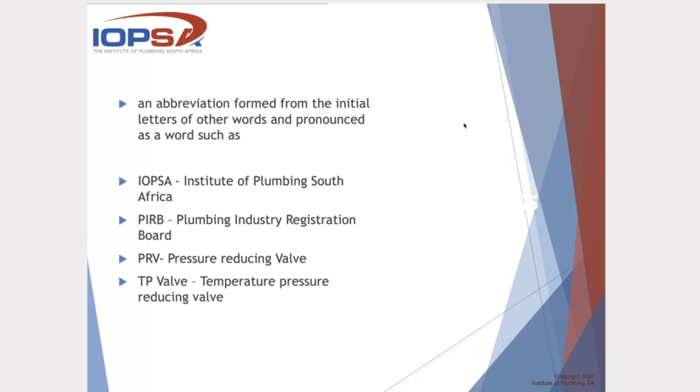But what do you do when you use an acronym in written communication? You'll write out the word fully. So in the case of the Institute of Plumbing South Africa, and then in brackets you will put IOPSA. The first time you use that acronym in any writing, directly after that you put your acronym, and then you can use it freely in your document thereafter, because you've explained it right in the beginning.

And so in your second paragraph, you can say the fact that IOPSA is a member organization means that it has a different mandate to the PIRB, which is a registration body where plumbers register to be licensed, because you've already qualified what that acronym is in the first paragraph.

So what a technical report is not: it is not there to entertain people. You're not going to keep the reader in suspense. You're not writing a thriller. You are just reporting, and that is basically it. Explain or give feedback on a situation, and in the case of a plumber, normally done after an inspection of a plumbing installation or a request pertaining to a certain occurrence. And at the end, we'll just briefly touch on doing a report for the sale of a property. I don't want to go into too much of that today, but I'm taking an example of a burst geyser.

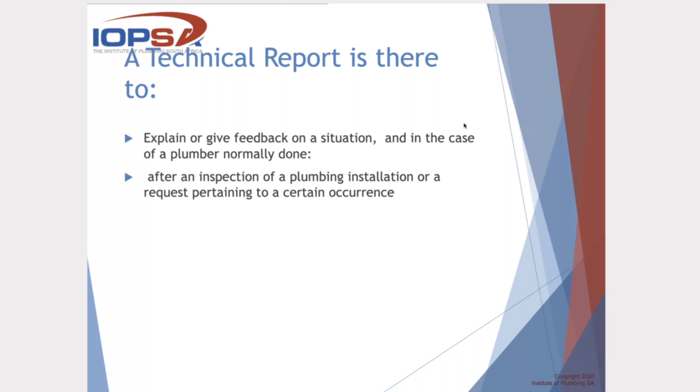So what is the composition of a report? You have a title, a strong title, because it must say exactly what this report is about. Introduction. In the introduction, you're going to give a bit of background, not too much, just what is necessary to qualify the report. And you're going to have an aim. The aim is to report on whatever the case may be. And then you've got the body of the report. Now, some call it a summary, some call it a brief. I just call it plainly a report. That is the structure, the whole story is in the report. And then your conclusion. And in your conclusion, you will have recommendations flowing out of what you've discovered.

So once again, in the title, make it concise, relevant details. So here's an example. You'll have your resultant damage report on water damage at 25 Pinelands Drive, Cape Town for the insured Mr. Jones, 19th November 2020. So there it says what the report is about. It's about water damage. Where is it? Got the address and who it is for, and the date that you're doing this document. The introduction contains the background to the situation, any information that the reader would require to understand what the report is about.

So let's look at an example of this. You've got that strong title up there, report on the possible cause of water damage, and you'll put it in bold letters and capital letters so that it stands out. Introduction, because something that stands out leads your reader through the document. Eventually, if a good reader and a good report writer understand each other, he'll only have to read the introduction, the conclusion, the recommendations and findings, and he'll know what's inside the report, because sometimes he doesn't have to know all the detail, and if he wants the detail, he can go and refer to it.

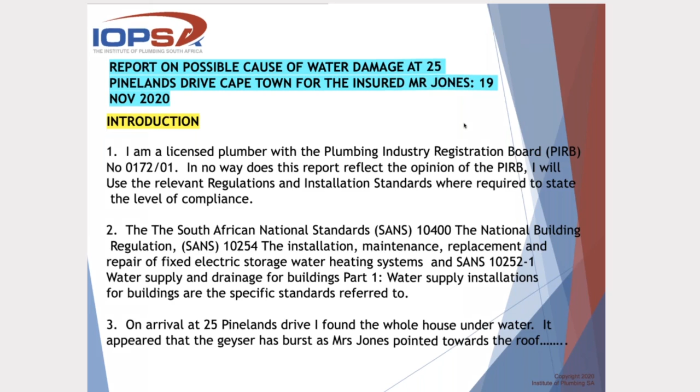What is the aim of the report? The aim of the report is to report on the possible cause of the resultant damages at 25 Pinelands Drive on 19th November 2020. To write the aim is very important, because you must know what is the aim of this document.

What do you want to achieve? Is you want to report on the damages, and that's all. Because everything you're going to write hereafter, you're going to qualify it against the aim.

So you can actually write the aim somewhere next to your document or next to your keyboard, you put it down there, and as you write your document, you look at the aim and see, am I referring to that aim the whole time? Am I keeping to this? Because if you are diverting or digressing, you're not following the aim. So you can test everything you write against the aim. Are you reporting on it?

Right, in the report, you're going to have, for instance, the geyser. You're going to state the location of the geyser in the cellar cupboard, hanging from the wall only by the pipes and one rawl bolt. It was found that the geyser was a 250-litre geyser, and the feet of the geyser were badly corroded. The wall was full of mold and wet.

Short, to the point. And then you'll have just after a discussion, and you won't have a finding after every discussion, only if it's relevant and it pertains to the aim. And so here we have a finding. It was found that the geyser was not suitable for wall hanging as specified in SANS 10254. And then you can put in the relevant paragraph there, 5.4.2, where it states that a geyser larger than 200 shouldn't be wall hung.

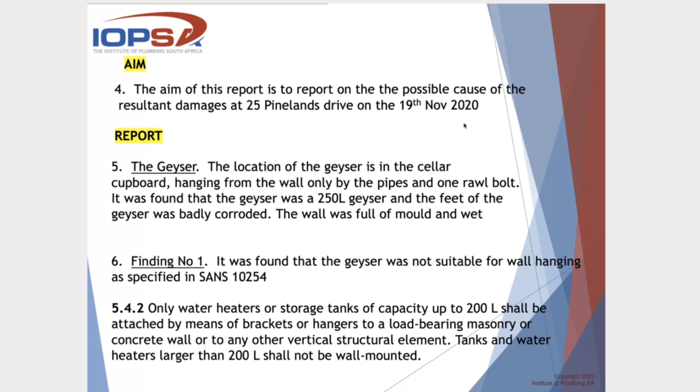Finding number 2, you can have 2, 3, 4, or 5 findings out of one paragraph of discussions. It was found that the wall that the geyser was mounted to in the cellar was wet, with moisture and mold showing on the wall. And then you'll have a next point of discussion, pipes. The pipes are all in good condition, and some could possibly be recovered for reuse. Short and stately. There's nothing more about it. There was no finding to be made on the pipes, so you're not going to make a finding if there's nothing that you can find on it.

So water damage that appears to be from the pipes that dislodged when the geyser tore away from the wall, and therefore without adequate testing, I could not safely state that the geyser has burst. So finding number 3, it was found after discussing the matter with Mrs. Jones that the geyser was 10 years old and they replaced the anode yearly. So you made this finding, and you go and test your report against the findings and your document aim. Very important. Go and see, is it still pertaining to the aim? Are you reporting or are you digressing?

The aim of this report is to report on the possible cause of the resultant damages. So that's all you're doing there. You're just reporting. You're not making any statement of it's because, or a finding that it's because of negligence or whatever the case may be. You're just reporting.

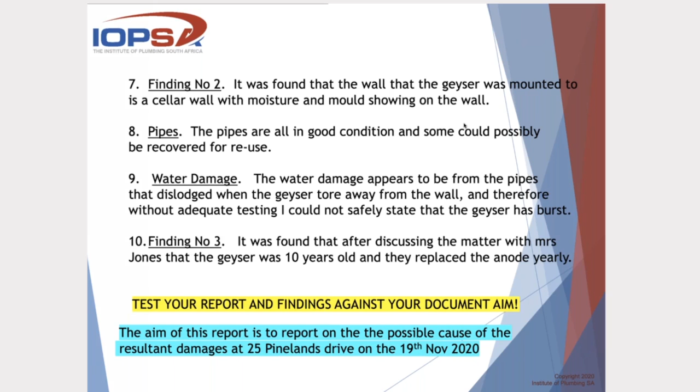Then after a couple hours of writing, you've got all the findings that you've made, and you've got a list of findings. Finding number 1. It was found that the geyser was not suitable for wall hanging as specified in SANS 10254. Now you'll see I'm referring to paragraph 6. So what you've got is this body of the report. You wrote the report and you have all these findings, number 1, 2, 3, 4, 5, and as many as have been made. And then after that, you make a list of the findings so that if the reader wants to see all the findings, they're all together.

So once you've got all the findings together, it's easier to read and makes it more logical in sequence. So you have this list of findings, but they must also follow in sequence. So you have finding number 2. It was found that the wall the geyser was mounted onto in the cellar had moisture and mold showing on the wall, paragraph 7. And so you go on, and I see I've omitted the paragraph number for finding number 3. That would be paragraph number 10. So it was found that after discussing the matter with Mrs. Jones, etc., etc. So no new findings or discussions are made at this point.

If you come to the findings, and as you go through this, your logical thought process is being triggered. You discover, oh, well, maybe I should make this finding. You're not going to make a new finding now. You must go back into your report, and you must go and state the facts again, because these are new facts. You can't just now come up with new facts. You must go back into your report, and you must work it into the report, write those facts down, make a new finding, and then you can come and add it in here. You can't now make new factual statements over here.

So then you write your conclusion, and the elements of the introduction are not now repeated. You're not going to tell them about the introduction and the background again, because it's there already. So a good reader would actually just want to read the introduction. He'll read the list of findings, and he'll read the conclusion, and he'll have the whole report.

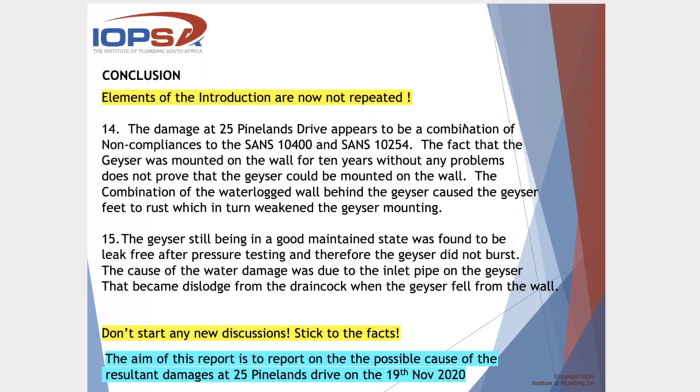So then you come to: it is my opinion, based on SANS 10254 para 5.4.2, that the geyser was not approved for wall hanging, resulting in a catastrophic failure with the resultant water damage that occurred. So there's your final conclusion of what happened. After that, you can have recommendations or not. It depends on the possibility. Are you going to do the work? They'll most probably come back to you anyway and say, listen, you're the specialist in this field. What do you recommend we do now?

So then you can put in the recommendations. You say it is recommended that the moisture in the wall be investigated by a competent person as to the origin of the moisture behind the cellar wall. You move that away from yourself because you most probably can't put a geyser there again. The wall is still water damaged. That is what caused the original problem.

Not too much, just what is necessary to get them back to the original state of having the hot water then, obviously. No humor, sarcasm, or advertising. You're not going to put in there, but you know, you can contact me for a good price or whatever the case may be. Always refer back to that. The aim of the report was to report, give the possible resultant damages, and you have now given them a couple of recommendations which could put them back on track the easiest way possible.

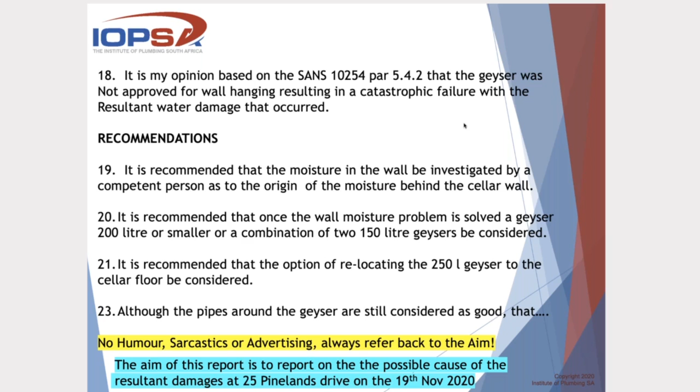So let's look at the composition of the report again. You've got your title, your introduction, the aim, the report, that's the body of the report with all the technical information in, whatever it need be to qualify this report. You would have some findings out of it, and then you'll have your list of findings. Moving into the conclusion, after which you have recommendations. So as I said, a good reader only needs to read the title, the introduction, the aim, and the conclusion, and then you would know exactly what it is about.

So can you issue a PIRB COC for the sale of a property? This is the question always. So no, not yet, as the current COC is not designed for that purpose. But what can you do? You can write a report, and this can take a lot of time. So when you're doing something like this, you must make sure that you have the standards well in hand, and you must know them. Remember who the reader will be. If it's a plumber, you can be more technically specific, but if it's for Mr. and Mrs. Jones, use easily understandable terms, not too technical. That is what the Consumer Protection Act says.

So if they come to you and they say, I need a COC for the sale of a property, well, our COC is not designed as such, and it's in the process of being designed. And I'm quite sure Steve will most probably come in and tell us how far they are with it and what the process is. But at this stage, you cannot issue them a PIRB COC, but you can write them a report. You can do an inspection, write them a report in this fashion.

Here's an example. In your report, you would most probably have photographs because that's the easiest way of doing it. You have some notes on the photographs, arrows pointing, showing what the minimum height would be for this tap. And you'd have paragraph 5. This is part of the report. It will be on the photo above. The same PVC tap is used and not at the required height. Also, all exterior pipes are PVC and painted, which should be copper per SANS 10252 Part 1. No PVC pipe for water reticulation is approved for outside use being exposed to UV.

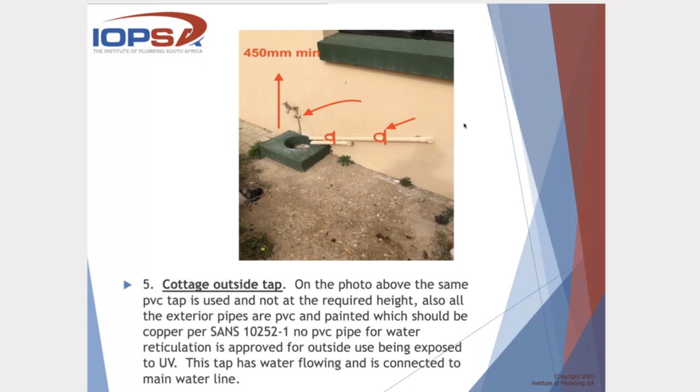Ground floor bathroom, the toilet pan collar has pan seal wax sealing the toilet, and it cannot be established if leaking or not, as there is no water supply to the main house due to the geyser being incorrectly coupled. The toilet inlet and mechanism is old and has various modifications inside the bowl, not clear if functioning properly. Pan cemented to floor, making it not serviceable at the pan collar to replace. Just reported on the facts.

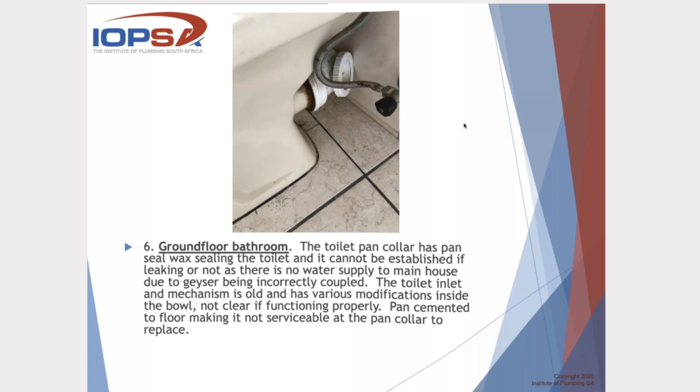Another toilet report, main bedroom toilet cracked at the base and the pan collar smeared with pan seal. Toilet will have to be replaced as it has a serious crack and can implode under weight. When replacing, the toilet pan collar can be replaced. Toilet inner works also modified with pieces of wire. Toilet needs to be disinfected before removal, as it is also foul.

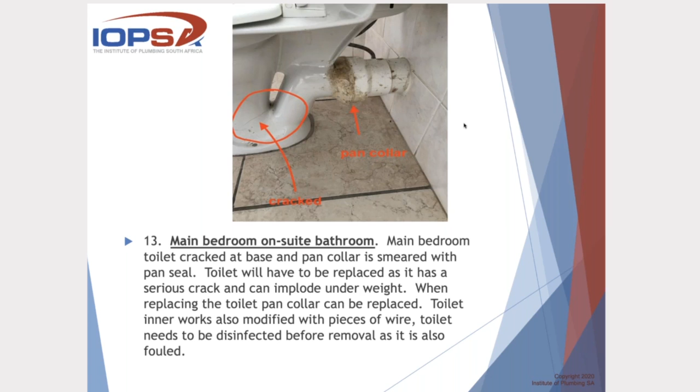So once a report is delivered for plumbing inspection of a property for the purpose of sale, the non-compliant issues could be corrected, and then a COC for the corrected items should be issued by the plumber making the corrections. So that is when somebody asks you for this, and I've seen this more and more in the Garden Route, sale of property, people are requesting this.

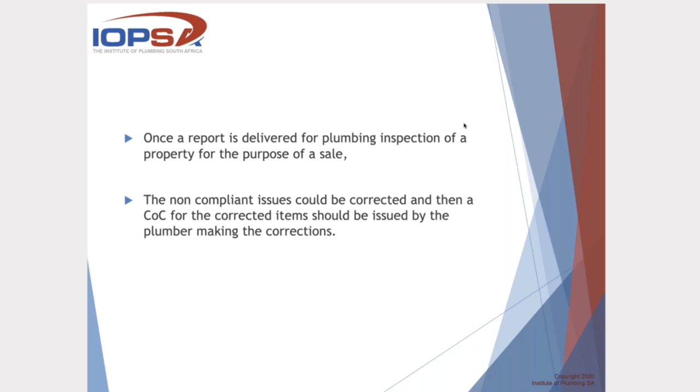I do say to them, our COC is not designed for this purpose, but we can do an inspection and give you a report. And if there are any non-compliances, whoever is going to repair these non-compliances, that plumber can then issue you a certificate of compliance for the work that he has done. But that won't be for the sale of the property, it's only for the work that is done. But that would be an additional item to your report.